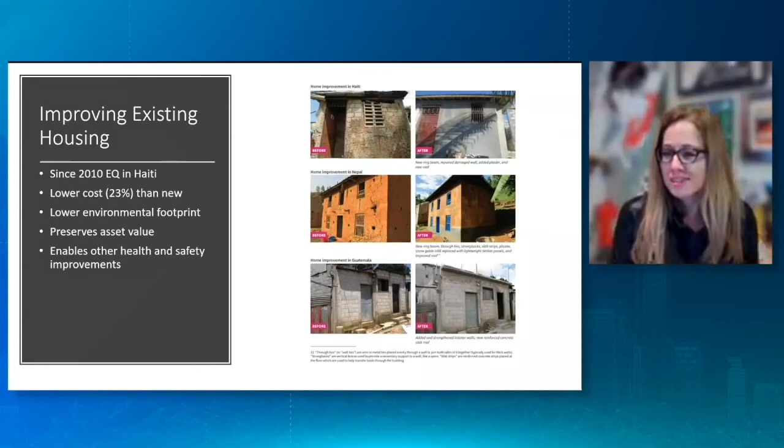It also has a lower environmental footprint. We can save carbon impact and impact on the environment by strengthening housing before disasters. Here are just a few examples of some of the homes Build Change has retrofitted around the world, in Nepal, in Colombia, in Guatemala, in Haiti, and in other countries. It also preserves the homeowner's investment in a disaster resilient home and enables other improvements that improve folks' daily lives.

Now, how do we approach the challenge and opportunity of resilient housing? Let me give a bit of an overview about how Build Change works. We simultaneously overcome the three barriers to adoption of resilient housing: people, money, and technology.

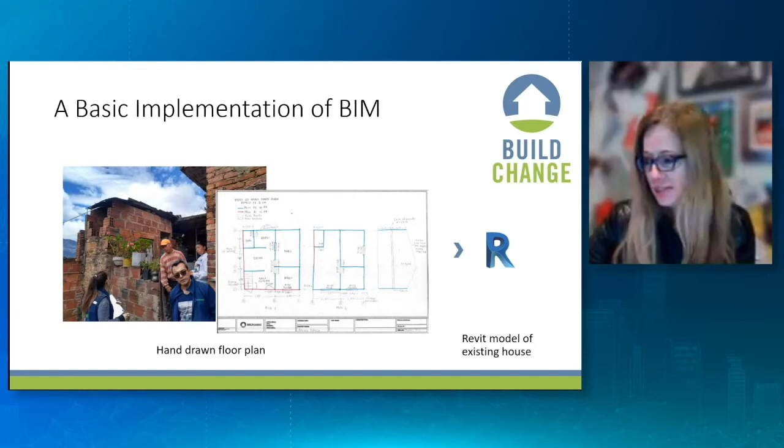From here, an engineer would need to use the Build Change design manual and a series of Excel spreadsheets to generate a specific retrofit design catered to that specific house. After the design was created, it would need to be applied to the existing Revit model to represent the retrofitted house. After construction, the final construction documentation and construction package could be collected.

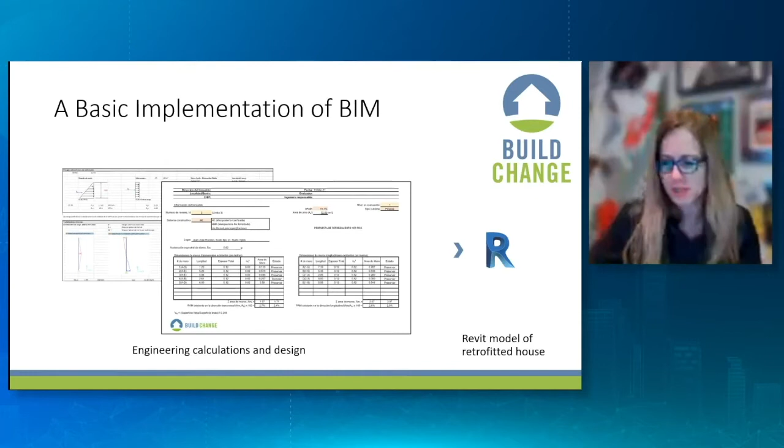But there are a lot of steps here, all done manually, using one system to another to another. So even with these advances from AutoCAD 2D, which we used in the early days, to Revit, the process was still very manual. Here you can see one implementation of a final retrofit model after the 2010 earthquake in Haiti. We first adopted these tools, first adopted Revit, in Haiti, and our first attempt was again very cumbersome and very manual.

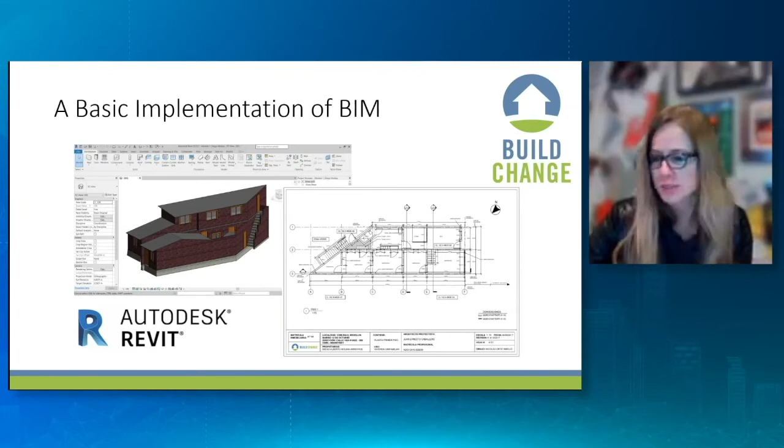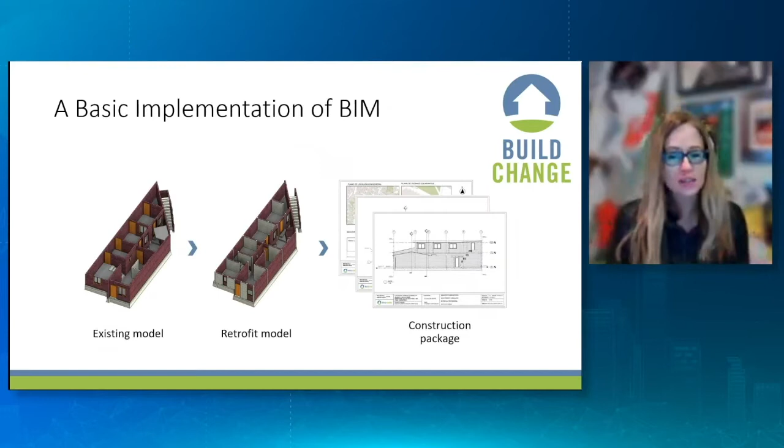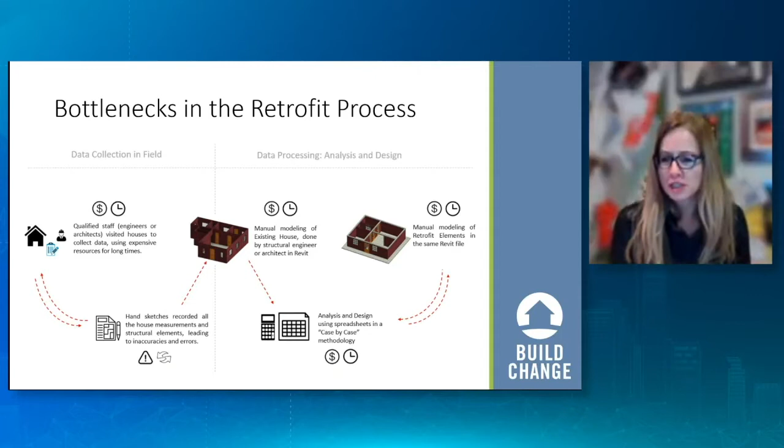We went from an existing model to a retrofit model to the construction package, and in the end these are quite useful tools, but it took a very long time to get to this point. These are some of the bottlenecks in this process: everything from collecting data in the field, hand sketches being recorded, manual modeling of an existing house in Revit, to analysis and design done by spreadsheets, to production of the retrofitted design. So many steps in the process, and a lot of opportunities for error.

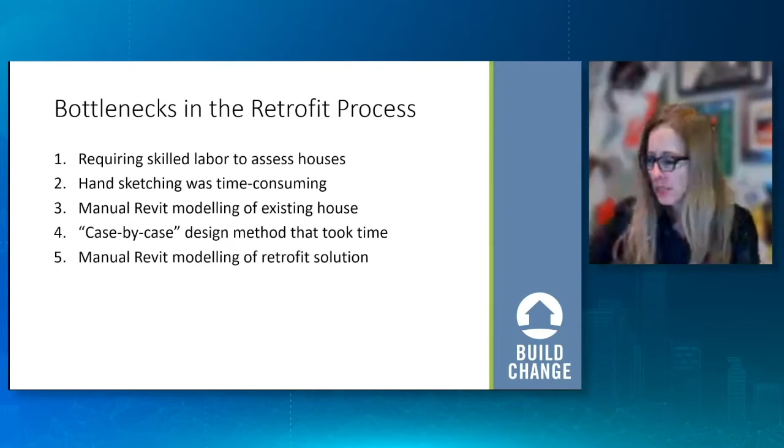So we asked ourselves, wouldn't it be better if this process was automated, if it was much more efficient? Fast forward, and we began automating designs in Revit with Dynamo. Dynamo is a very critical tool here that allows us to program in the design checks.

We first explored this in our Nepal program after the 2015 Gorkha earthquake, where we used the visual programming interface within Dynamo and tested it for the first time to determine if it was a useful way of automating the retrofit design process. The typology of housing in Nepal lent itself to this process because most of the houses were similar 2 or 3 story stone masonry, rectangular shaped buildings with similar patterns of windows, using the same building materials over and over again.

These similarities allowed us to come up with a type design for retrofitting that could be applied to many thousands of houses that fit the same criteria.

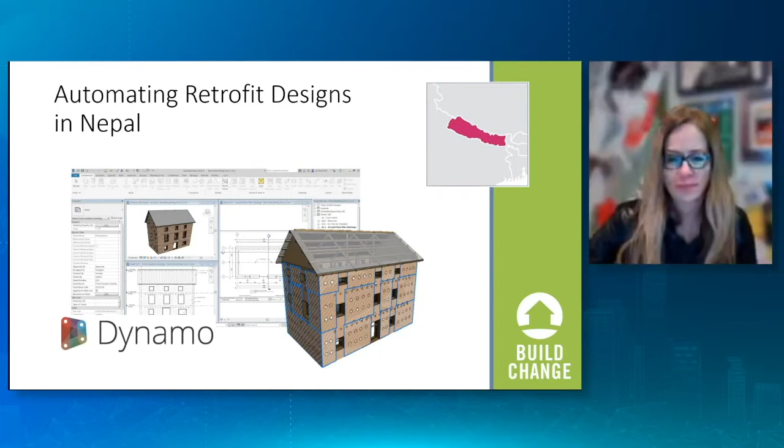Here's a quick snapshot of how it works. Structurally retrofitting a building typically involves strengthening it from within by connecting a series of reinforced concrete columns and beams to the existing walls and structure.

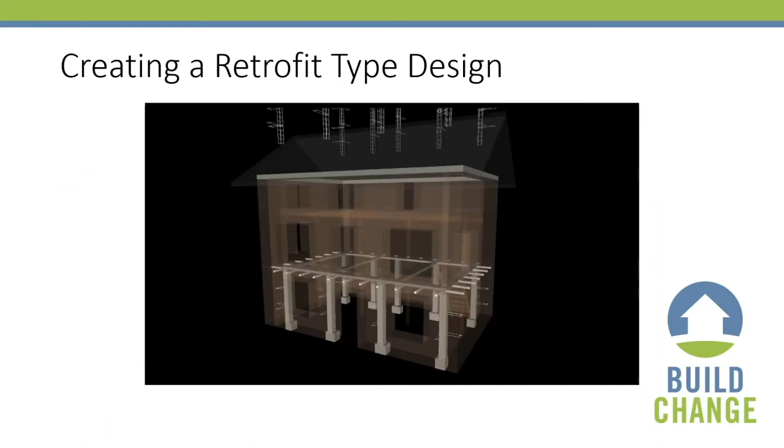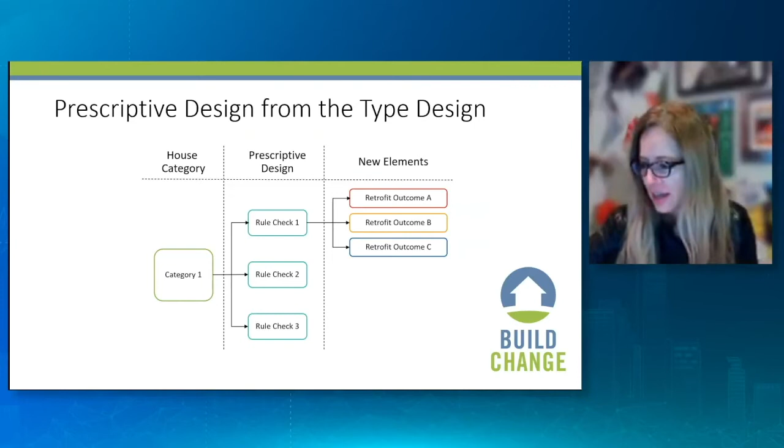Prior to this, however, we typically have to do an analysis of the existing home to ensure proper assessment. By using prescriptive design, basically creating a set of design rules that we can apply to each building, we're able to eliminate intensive structural engineering for each house. We do it up front and create a set of rules that we're then able to check with each home. This expedites the process significantly, and we're able to reach more homeowners with solutions.

For example, one rule check we'd evaluate is the length of the house and where columns should be located. We place columns at specific spacing based on that length and a variety of other factors. Another rule check was to evaluate the height and thickness of the walls to place a ring beam on top of them. These are very simple rules that we can develop based on structural engineering analysis as well as the geometry of the building.

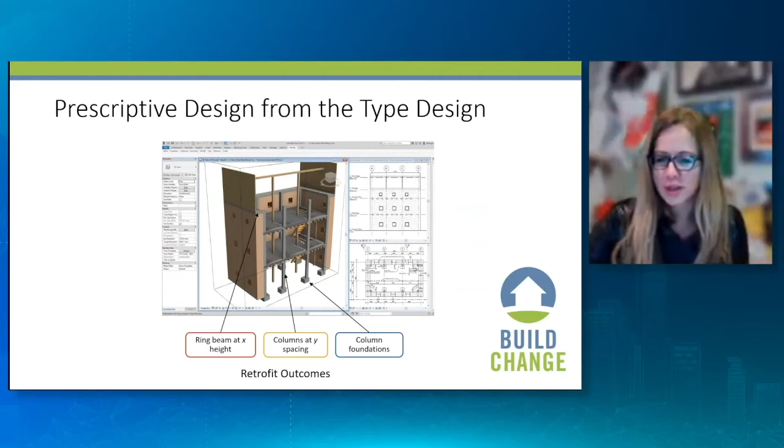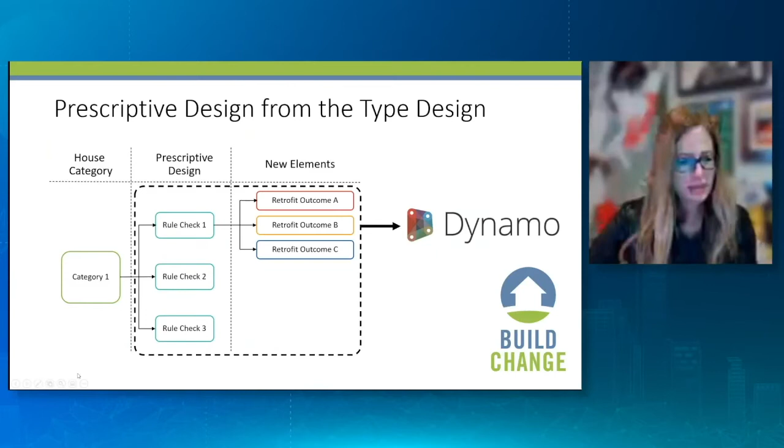So the engineering methodology was adapted to suit the technology. When the engineering rules were simplified to a series of yes or no statements, these checks could be easily programmed into Dynamo. This next one shows an animation of that process.

It's an example of a Dynamo workflow we developed based on a type design in Nepal called the splint and bandage retrofit method. This method aims to reinforce the openings of the house with reinforced plaster in splints on the sides of the openings and bandages on the tops and bottoms.

I'll play it again here. You can see how quickly it moves through these checks. We've got a Revit model developed based on an actual house, an actual design, and then a set of checks done in order to design a retrofit. In just about 17 seconds, we can run through these checks, design the retrofit, put in the ring beam or the splints and bandages that need to be implemented, and come up very quickly with the design, the bill of quantity, and the cost. This is an outstanding step forward in using BIM tools to automate structural retrofitting of existing housing.

When we started, I think people thought this was going to take forever because every house was different. But if you group like houses together, which are the same, and come up with a prescriptive yes-no way of evaluating the building, then this works extremely effectively.

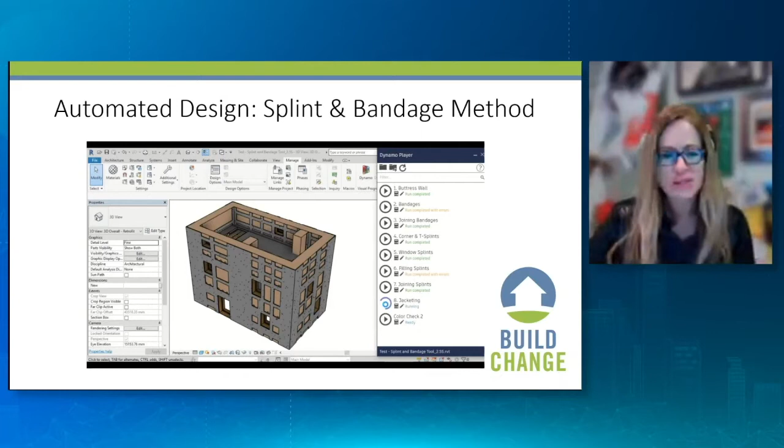So remember our workflow, which in the beginning I said these first 3 steps take about 9 days. This process using Revit and Dynamo scripts, we've reduced to 3 hours. So from 9 days to 3 hours, it's a huge increase in efficiency, and it can be applied in many neighborhoods with many different types of housing around the world.

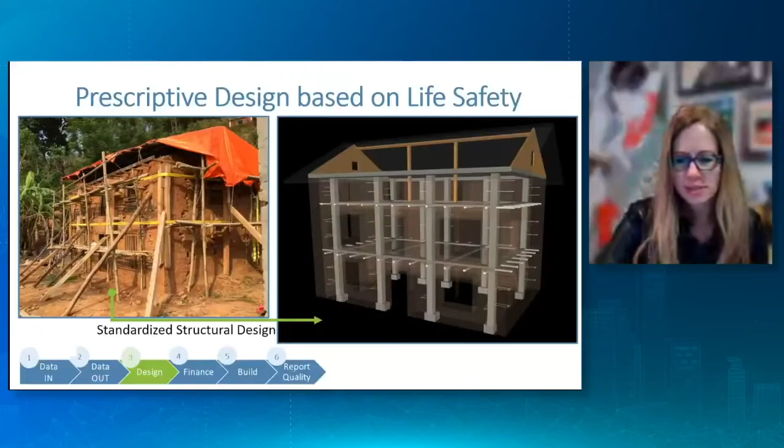This is an example of an actual house that we strengthened in Nepal, as well as the Revit model of the strengthening solution. And we also have a virtual reality experience.

We created a virtual reality experience so people could experience what a retrofitted house looks like. This is again in Nepal, and what we have here is a home that was strengthened after the 2015 earthquake. You can enter the building, look around at the strong backs that were used to reinforce the house, go upstairs to the second floor and look at what was done - strong backs reinforcing the walls, ring beam, and new roof.

And the beauty of this is that you can actually click on the Revit model and see the model - this is the model that I'm showing now. So we can see both the actual building and the Revit model of the home. It's an exciting way to communicate not only to homeowners about what will happen to their home during the retrofit process, but also to stakeholders at large. The potential of this tool is truly enormous.

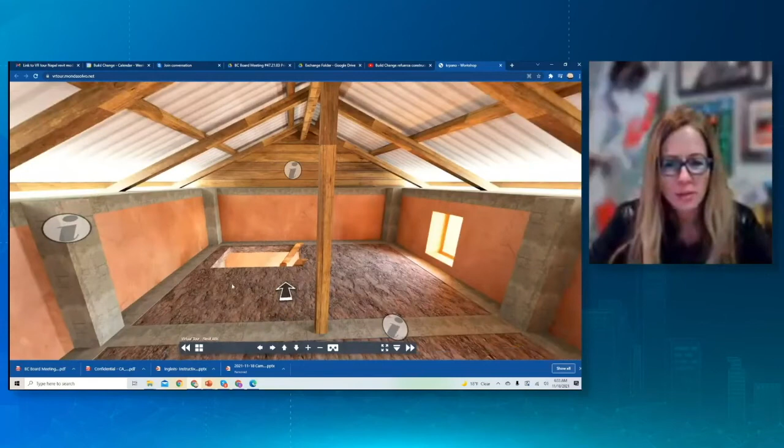So let's go back to the main presentation. Now we have the opportunity to accelerate design of housing retrofits in Colombia using these tools - this combination of automation through Dynamo and Revit, as well as improvements on other steps of the construction value chain.

So can we innovate? We've been innovating on the design and construction process, but can we innovate on some of the other steps to make it even more efficient? Can we innovate on data collection in the field, as well as the other steps of the process? So we can do that using other automated tools.

We have applied Fulcrum and Magic Plan for streamlining data collection. Fulcrum is an application for designing custom smart forms, used by Build Change to collect a wide variety of data on the house as well as the homeowner, including demographics of people living in the houses, and data on the structural vulnerabilities of the house. It also allows us to capture photo and video of each house and store that data in a convenient location, which can also be accessed by government partners and other partners. It's a very useful tool that can be customized to the application, collecting a wide variety of information necessary to implement home improvement projects.

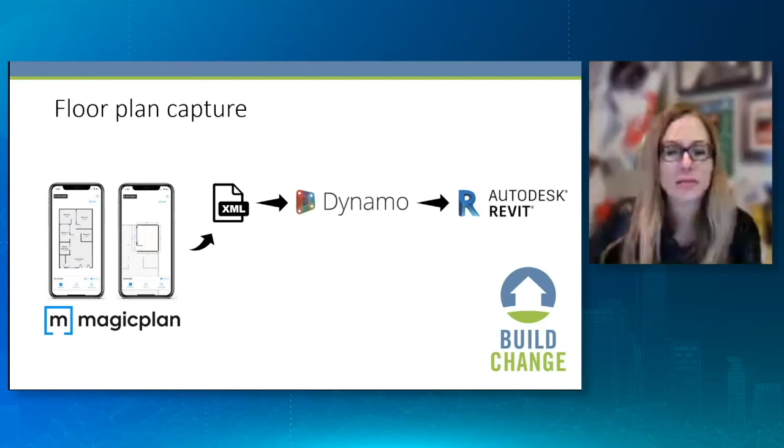So all of this process is now, I wouldn't say fully automated, but at least partially automated, reducing the time and reducing the cost. So here's an example.

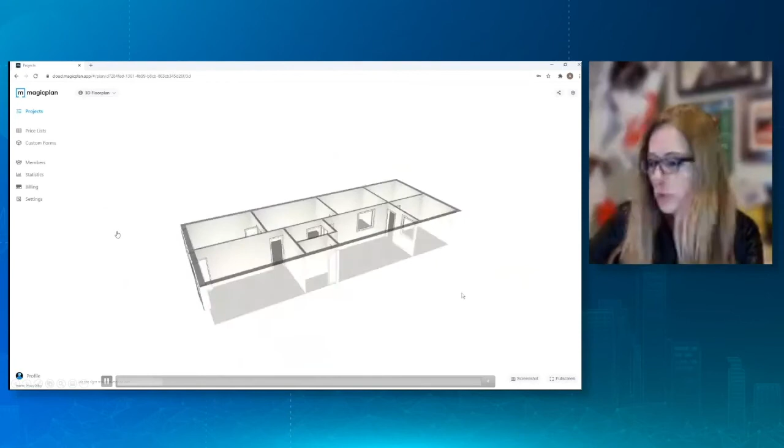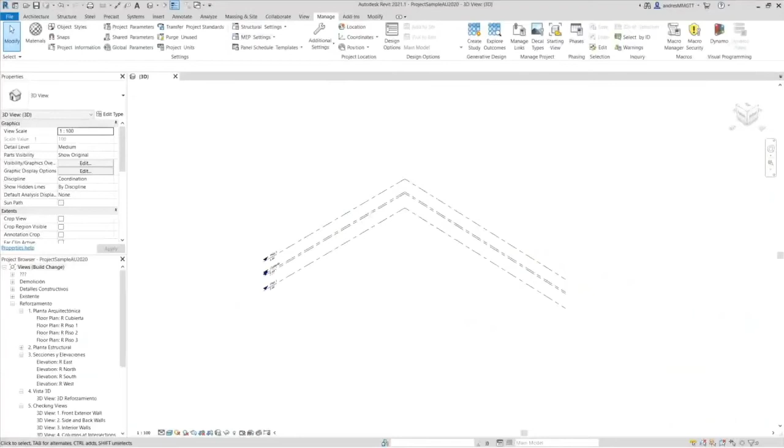This is a demo of an import process that we showed in a previous presentation at Autodesk University. It illustrates the process of importing that data from Magic Plan, importing that floor plan, and importing it into Revit. First, an engineer went to the field, drew the site in Magic Plan, and then imported it into Revit.

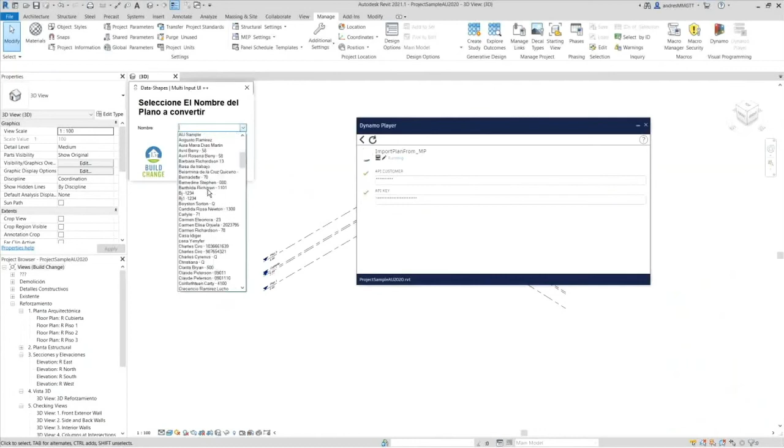So here it ends up being an exact replica of the home, and we don't need to draw it again when it comes to the retrofit solution. So we can use the same information and the same model to implement the retrofit solution and cut the work in half that way.

All right, so I want to talk a little bit about automating the design process. We've talked about making everything more efficient, but how can we do the structural design and structural engineering up front and then automate it?

This is something Build Change has done since the very beginning, for new construction as well as retrofit. We can simplify structural design into a set of design rules. For example, if we are missing plaster, we can add plaster. If we are missing a ring beam, we can add a ring beam. We can ask simple questions about the presence and absence of structural elements and then input a solution.

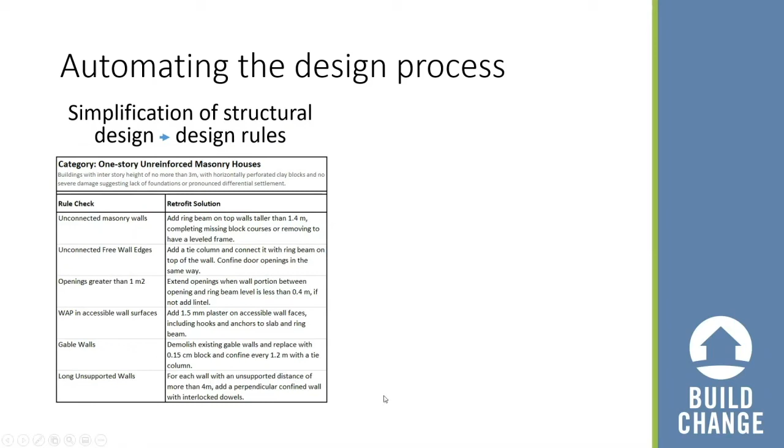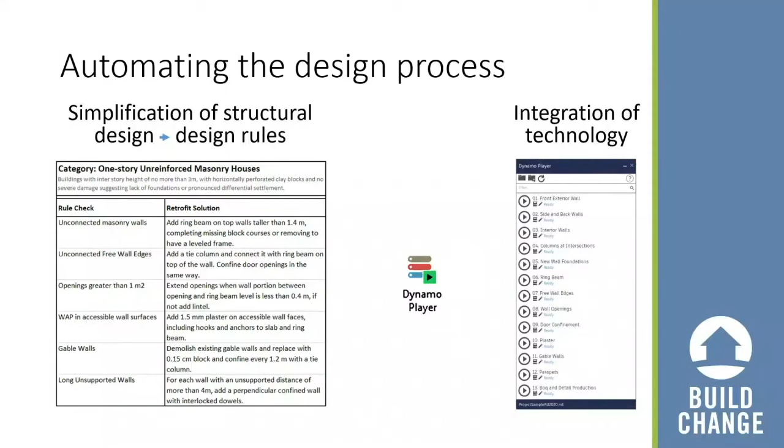We can also automate decisions about the placement of columns, windows, and doors based on simple geometry. We program all of this in Dynamo, and it does the work for us, which is an outstanding opportunity for efficiency and scale.

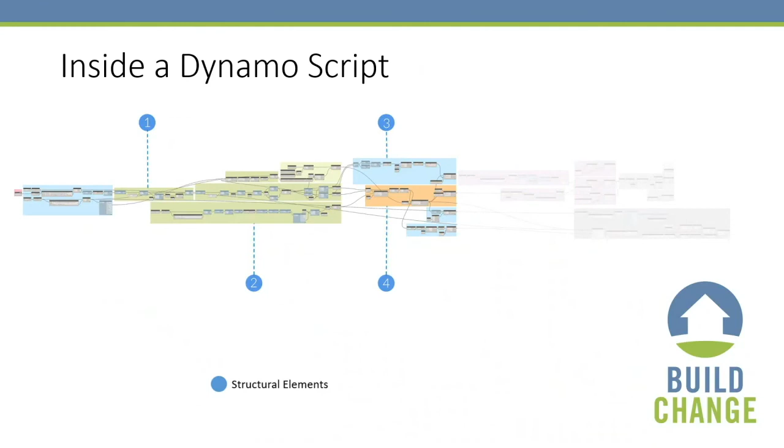Inside a Dynamo script, it actually looks quite complicated. I'm not expecting you all to be able to read what this diagram shows, but this visual programming environment gives us a very clear, powerful opportunity to automate these functions in Revit. First, geometry is taken from Revit and passed through several conditional statements that allow the script to place Revit elements according to its analysis. It's a fantastic opportunity and a superb tool if well developed for scale.

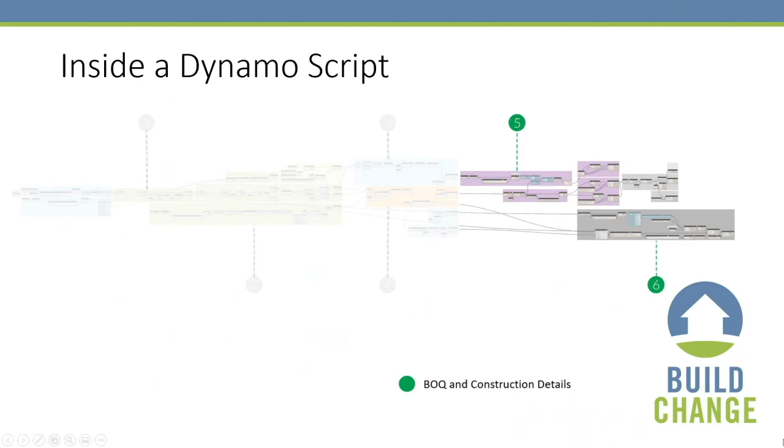So in the end, we have a complete retrofitting workflow that takes us from collecting data in the field to producing the design and construction documents we need in order to strengthen a home. I'll play one last animation here.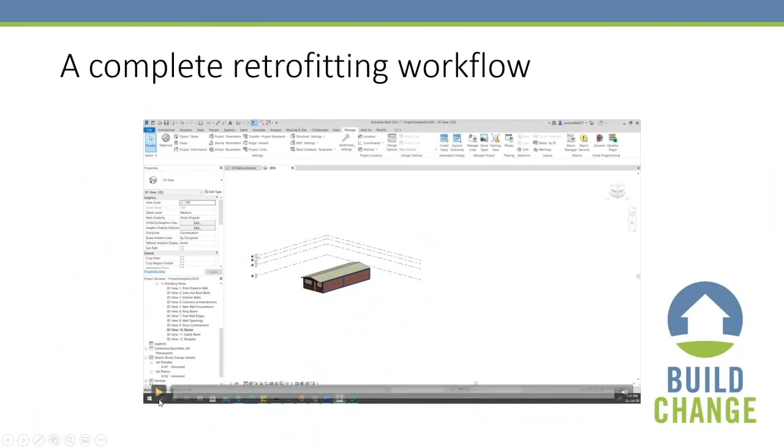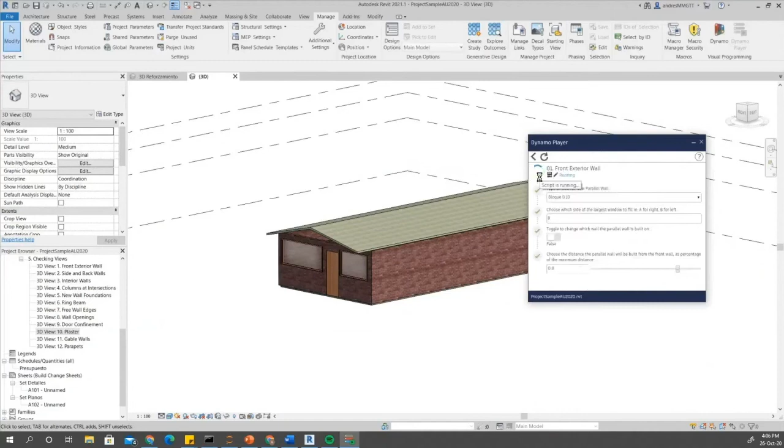This is the run-through of a complete retrofitting workflow. There are 13 scripts in total that the house goes through, in this case, to be retrofitted completely—13 checks. As you can see with the progression of each script, Revit elements are added to the model, modified according to the rules programmed into the script.

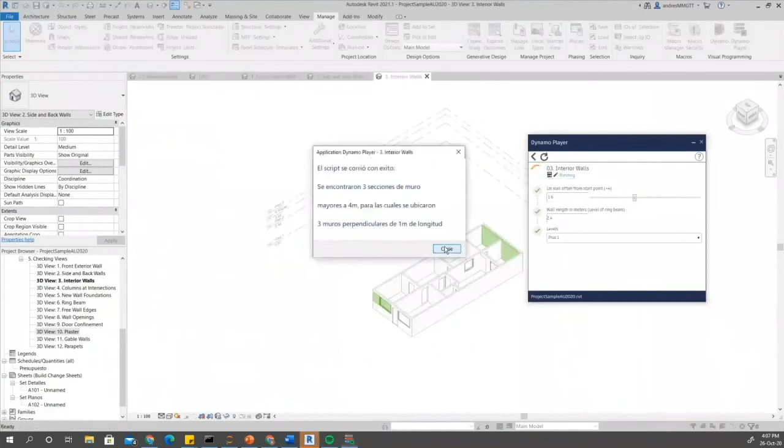This process results in a completely retrofitted model, retrofitted according to our design manual using this prescriptive design approach. There's some limited human interaction required through this process, which really allows us to speed things up and allows users with little Revit experience to execute the workflow. We don't need someone with a master's degree in structural engineering to run this—it can be run by those with less experience.

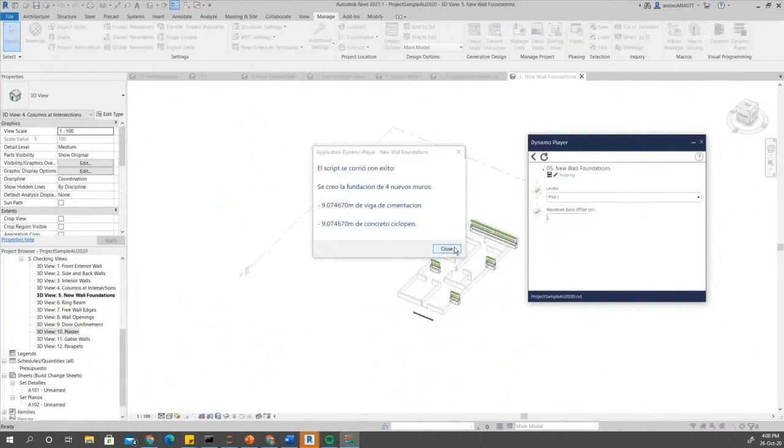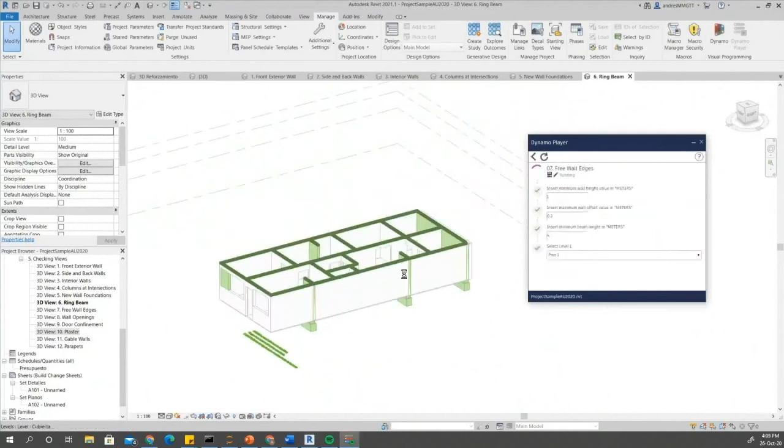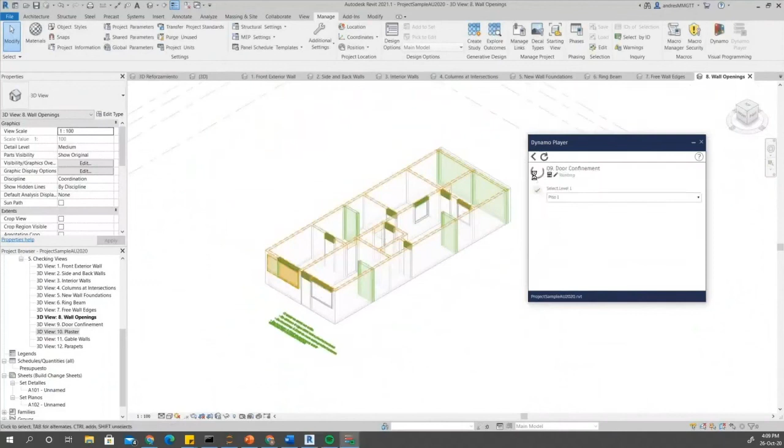At the end of the script, you'll note that this final script produces a bill of quantity and detailed production guidelines and assemblies for the house. It produces a bill of quantity as well as construction drawings and specific construction details for that particular house. We can put those into a design library to use in the future. So not only does this process result in a final retrofitted model, but it also results in a comprehensive construction package specific to that house.

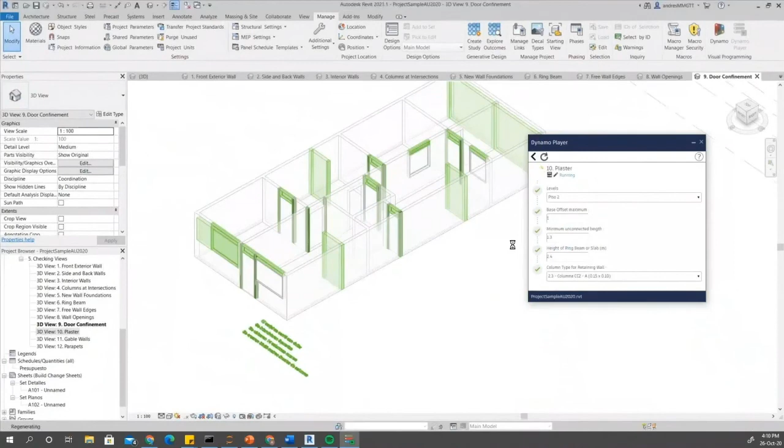It's just amazing what we can do with these tools now. I encourage you to use them, experiment with them, and reference some of the other presentations and resources that Build Change has available.

All right, on my final note here—we're not quite done yet. It's now running the check on the gable walls, so we're nearly done. We're on check 12. Parapets, and now we're running the bill of quantity and producing the details.

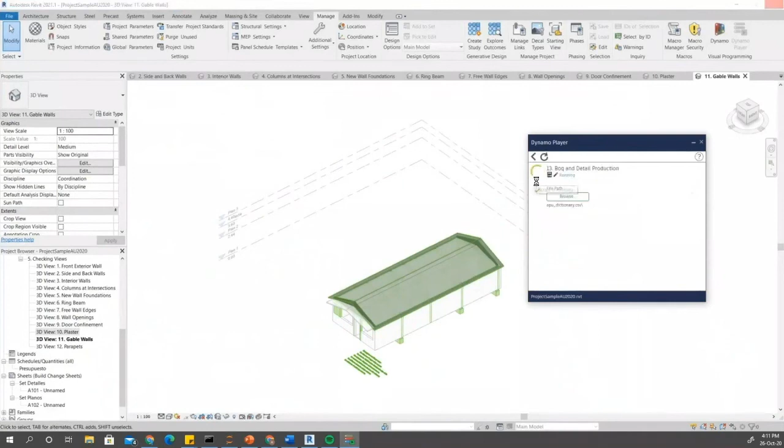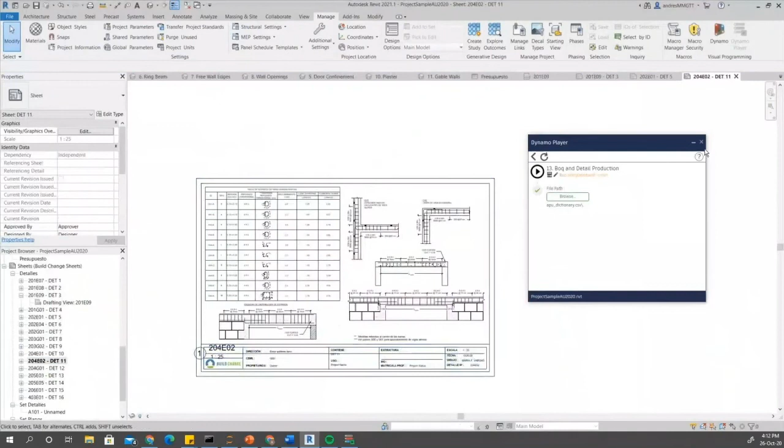All right, here we go. So the bill of quantity is complete, and we've got our detailed drawings. It's just magic, like magic. It's a wonderful tool, and again, it can be developed to roll out reconstruction and retrofit options at scale for similar types of homes.

So wrapping up here, we need to mobilize people and policy, money, and technology in order to retrofit and strengthen housing at scale so that everyone has access to a resilient home. We've now shared with you an efficient workflow for addressing existing housing, which also pairs with Build Change's manual for reducing the vulnerability of existing housing.